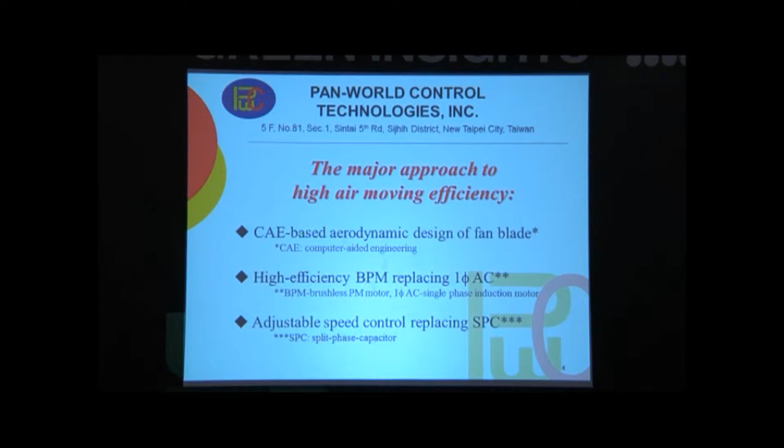In Taiwan now we take three approaches. Number one, we use CAE-based aerodynamic design of fan blade. CAE means computer-aided engineering, a kind of software where you can simulate the airflow passing through the fan blade, then change the shape of the fan blade to make it very efficient to carry the airflow field. I will show some examples on the next page.

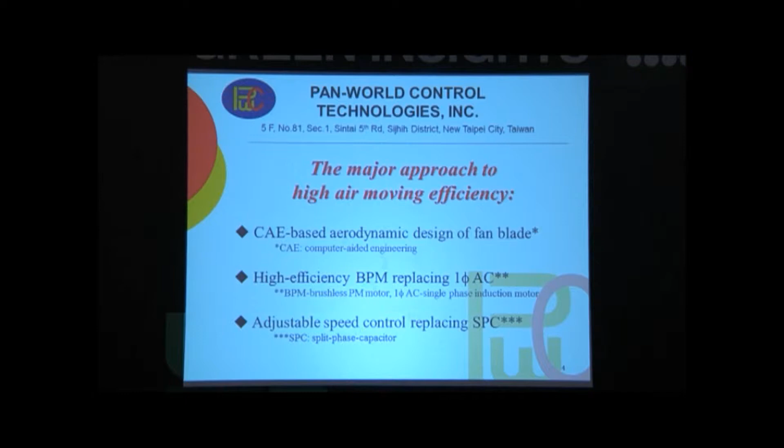The second is we use high efficiency BPM, which means brushless PM motor, to replace the single phase induction motor. More than 90% of fan motors right now use single phase AC motors, with efficiency just around 30% to 40%. But if you use high efficiency brushless PM motor, the motor efficiency itself can go up to 80% to 90%. There's a big difference between these two motor technologies.

Then we intend to use this new motor technology to replace the conventional one. The third approach is, unfortunately, if you want to use the brushless PM motor you need more complicated electronic control, that is adjustable speed control, to replace the SPC. SPC is split phase capacitor run or start technology, which is suitable for single phase induction motors. But for the brushless PM motor, we have to use adjustable speed control.

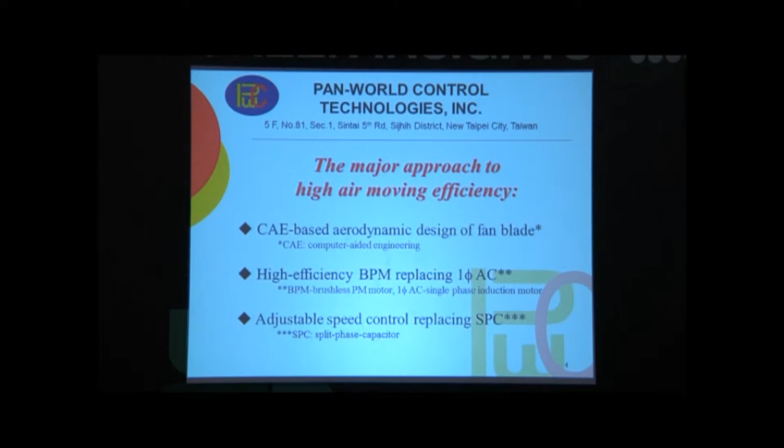There's another advantage when you use adjustable speed control: you can control the speed at very low speed. Most of the time when you use a fan, you don't want high speed all the time, sometimes you just want to circulate the air. Then you can control the fan at very low speed, which saves a lot of energy. For a ceiling fan as an example, at the lowest speed it only takes about 1 to 2 watts, which is very, very energy efficient. Now I will show you some examples for these three technology approaches.

The number one is, this is a standard design for the axial ventilating fan. You can see there's 9 blades here, and it's a straight shape. The blade shape is straight.

After we use 3D computational fluid dynamics analysis, a kind of computer-assisted analysis, to analyze the airflow field, we can modify the fan blade shape as a curve type, and also choose 7 blades. This kind of blade modification will make the whole system much more efficient, maybe more than 30% to 40%. So this is the technology we are using now to design the fan blade.

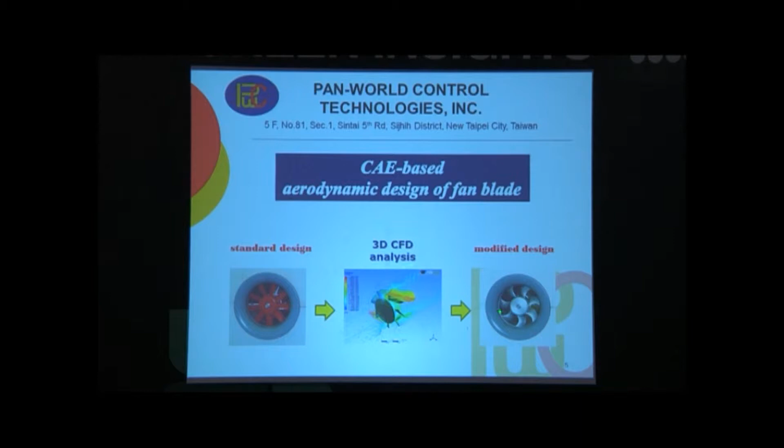The second one, I'll describe the difference between the BPM and single phase induction motor. I'll also take ceiling fan as an example. This one is a 5 blade, 60 inch ceiling fan, running at 200 RPM.

If you look at the conventional AC motor, diameter is around 188 millimeter. Compared with a brushless PM motor, it's only 150, less than 150. So by comparison, we can reduce energy consumption. For instance, single phase AC is about 110 watt, but if you use brushless PM, only 45 watt, that's 60% less. This is for energy consumption.

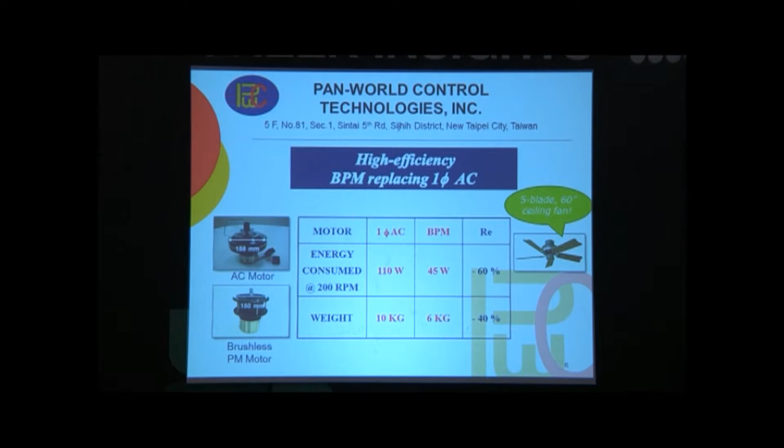For the weight, original conventional AC motor is around 10 kilogram, but if we use the brushless PM motor, only 6 kilogram. It's a 40% material reduction. These two parameters will save much more energy, from the energy consumption and also from the weight reduction. This is for the motor.

Then the next one I will describe is the control, using adjustable speed control. This is the block diagram for our controller. This is trademarked as vector drive. It's very complicated, I won't go into detail, but there are 2 points worth noting.

First one, you see, our controller is only connected with the motor, the 3-phase brushless PM motor, through the phase winding. There's no sensor feedback, no sensor feedback. For other techniques, usually they have to take some sensor to detect the magnetic field inside the motor.

But for our technology, we don't need any sensor to combine with the motor, because if you use a sensor to combine with the motor, the sensor itself is not as reliable as the copper and steel inside the motor. So our technology doesn't need any sensor - it's sensorless operation, sensorless technology. This is the first point.

The second point is our vector drive can generate almost pure sinusoidal motor current, and because it's sinusoidal, this will ensure high efficiency and silent operation. Right now consumers usually are not only concerned about energy consumption, they also are concerned about the noise, particularly during the night - if you have very high pitch noise, the consumer won't accept that. So our technology will ensure high efficiency, but also silent operation. You won't hear any high pitch noise at all. This is our technology, we trademark it as vector drive.

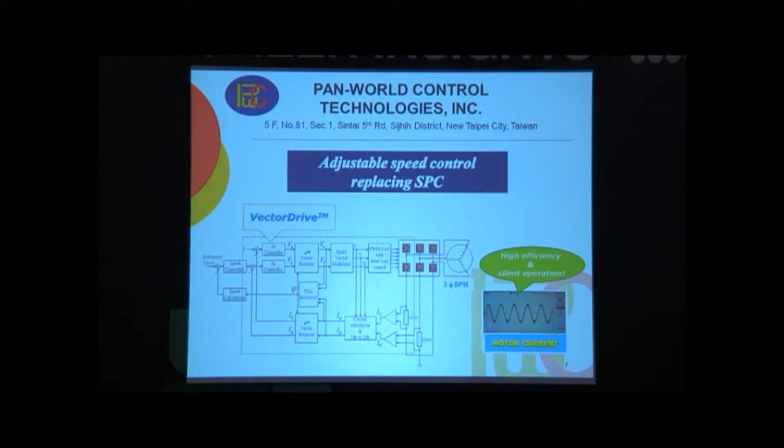Then I will show you some products we already developed using the technology I described. Basically 2 categories. One is a pedestal fan, like this. This is a pedestal fan. The energy consumption is around 20 to 30 watt, but for the conventional one, usually it's around maybe 65 up to 85 for a pedestal fan.

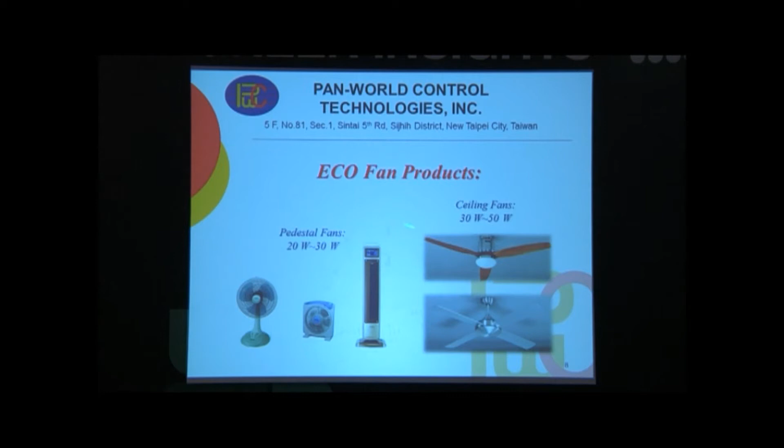For ceiling fan, usually it's around 30 watt. Using new technology, we have 30 to 50 watt, depending on the fan blade, the length of the fan blade. But for the conventional one, usually it takes about 85 to 100. So you can see using this technology, we have more than 50% energy reduction. This is our new technology.

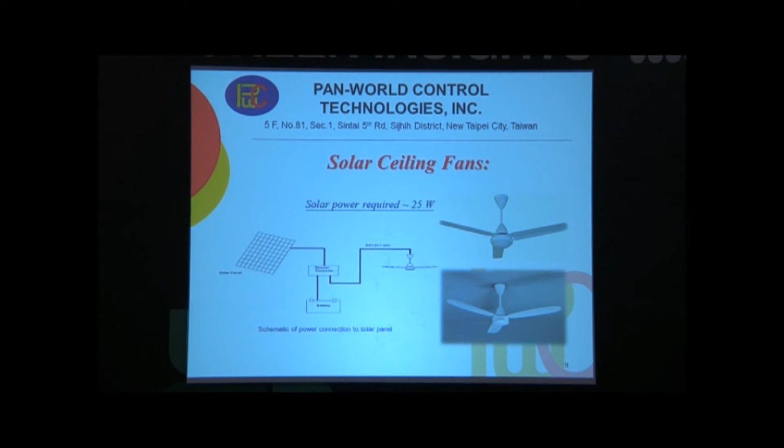We also have another product, which is combined with a solar panel. Because solar panel generates low voltage direct current, using our technology you can simply put the 12 volt or 24 volt solar panel voltage into our controller, then you can operate it. This solar power requires about 25 watt only. So this is the shape, just like your conventional ceiling fan shape.

Then the other one is the weight reduction. It's about 1/2 - you can reduce 50% around for the weight reduction. This is for the ceiling fan itself.